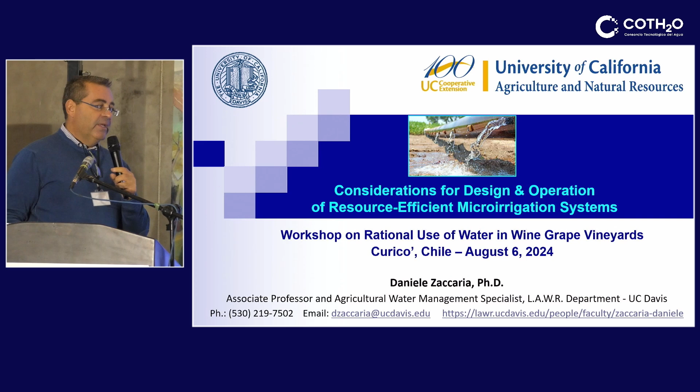In this presentation, I wanted to point attention on a few considerations that are often considered trivial, but I've seen in the last 15 to 20 years in California and many other places a lot of mistakes in design and operations of microirrigation systems. So today I want to point attention on a few things that are not trivial at all, especially when we are facing heat stress or drought and we don't have enough capacity on the microirrigation system.

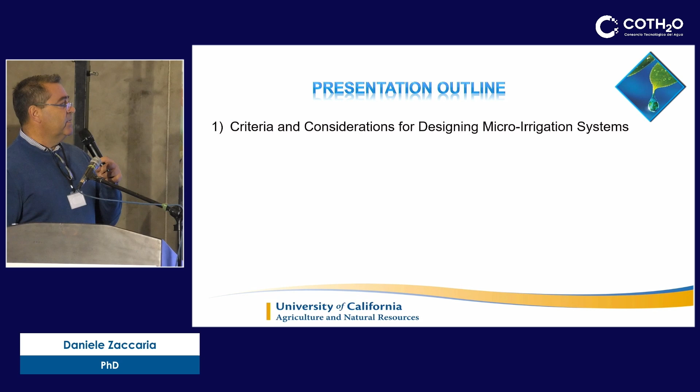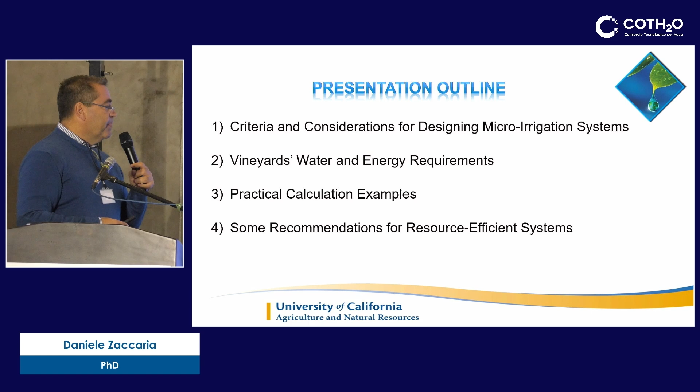So I want to go through a few criteria and considerations for design of microirrigation systems, and point on vineyard water management, vineyard water and energy requirements. Then I prepared a couple of calculation examples, but I'm not going to go through them for the sake of time, but those are useful for you later on for calculating the amount of water and energy needed for irrigating grapes. And I'll point out some recommendations for resource efficient irrigation systems.

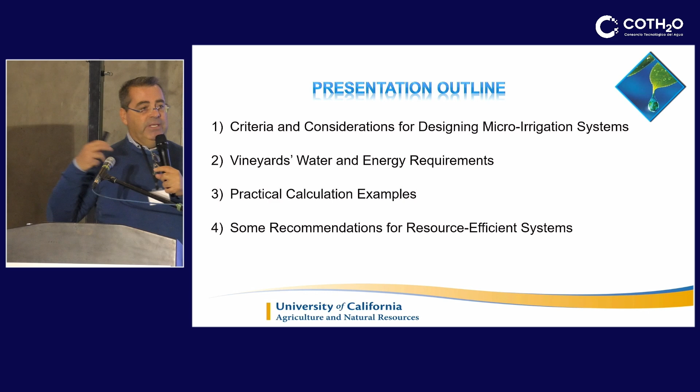I usually use the term resource efficient because it's not only a matter of water, but it's also a matter of energy. Energy is a big component in the budget now, especially after the energy crisis, the war between Russia and Ukraine. So we got a very high cost of energy, especially when we pump water from the aquifer. And the aquifer, in this climate of extreme variability of weather, is becoming some sort of insurance policy for growers. So being resource efficient means being efficient in terms of water and energy, all right?

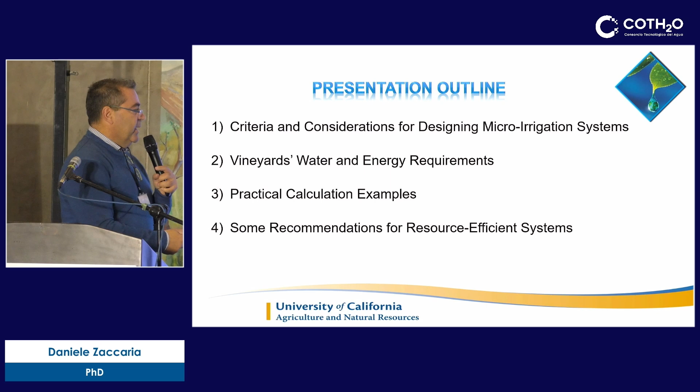So I wanted to give you some general understanding of what it takes to be resource efficient. First of all, everything starts with a good system design. It has to be somehow done by professionals that are skilled - we got one here - and it has to be accurate. It doesn't have to be cookie cutter, as we say, like the same concept applied regardless of the soil, regardless of the difference.

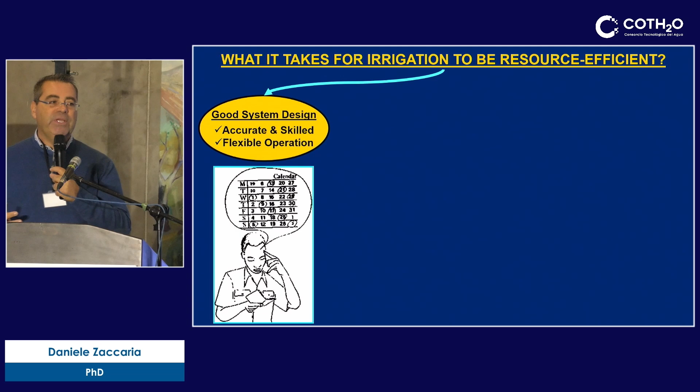But you also have to consider a flexible operation, because during the economic life cycle of the vineyard or orchard, we have to operate the system under different conditions. Then we have to have proper installation, so a good experienced installer, and after we install, there's regular maintenance and somehow periodic system evaluation.

All this stuff is always given for granted. Once you install a drip system, it's supposed to work at 95% distribution uniformity or efficiency for all its life. This is not the case. It depends on water quality, it depends on how the system is operated, it depends on the pumping system. So I've seen a lot of drip irrigation systems performing at 50% or 40% of application efficiency.

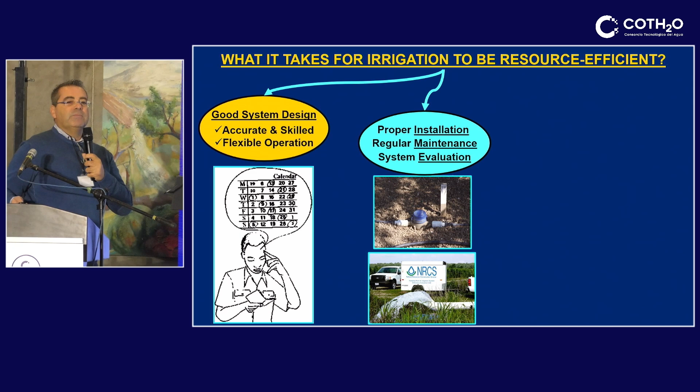It's very common in California that everything is given for granted, that the system performs well, and then we end up applying way less or way more of what we are thinking we are applying.

Then, after the two blocks are cleared out - so you have a good system in place, you have regular maintenance, and you have periodic system evaluation, you fix the problem - then you have to have somehow a defined irrigation strategy in mind, and this now has to be adaptive to the climate.

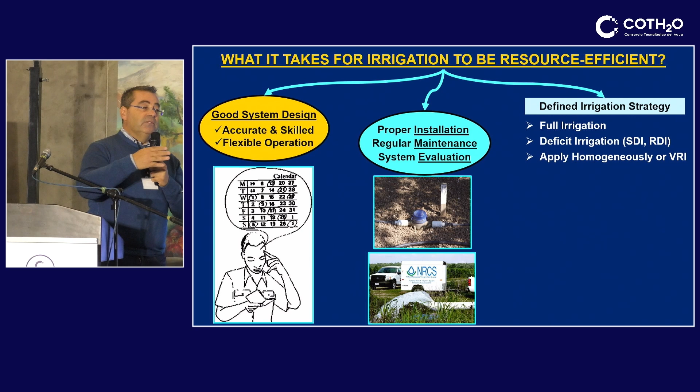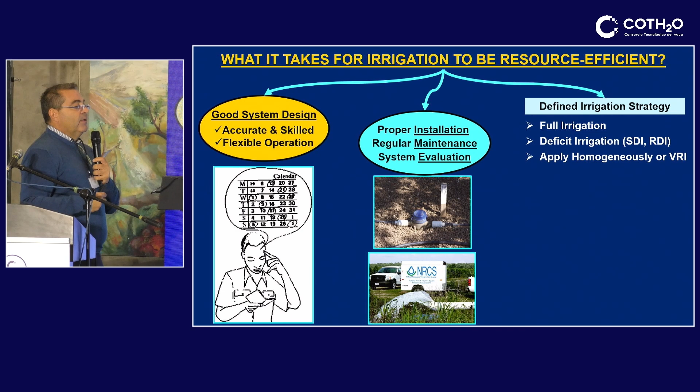So one year is drought, one year is wet, one year is average. So you have to have some sort of sense of how to apply water to your vineyards, and whether you're going to do full irrigation in a wet year or deficit irrigation. It could be sustained deficit irrigation, so below the potential, or regulated deficit irrigation, so apply less water during a specific stage, or you want to apply water homogeneously or site specifically.

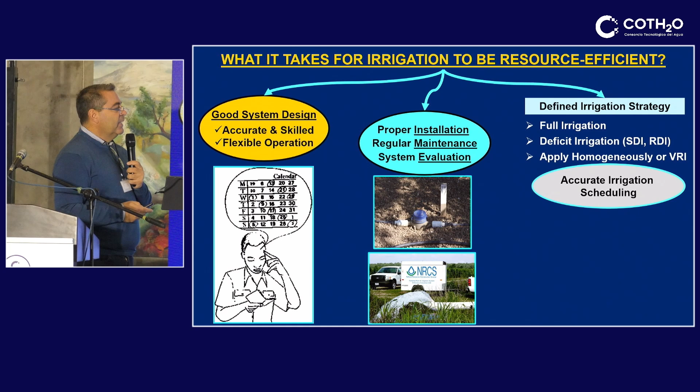So there are a lot of things that you have to consider in order to be efficient. Then you have to have good irrigation scheduling, accounting. We saw examples of satellite application. Mike gave a presentation on CropManage. So the scheduling is important, but then after the scheduling, you have to implement the schedule, all right?

And then once you implement the schedule, there needs to be feedback. So, have I implemented the schedule according to what I want to achieve with my grapes or not? So this looks like a very difficult pathway or route.

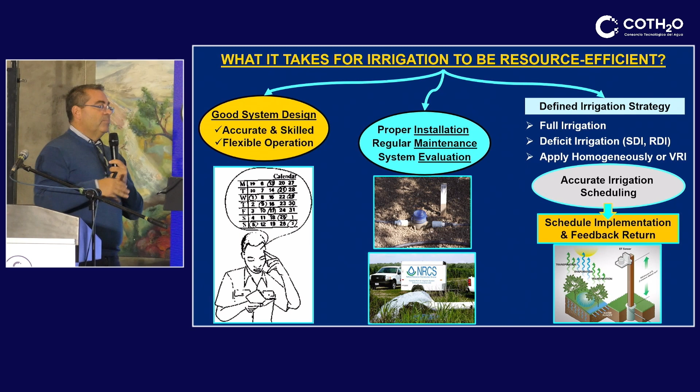But we always focus on - let me show you - the first block is related to good design, the second block is related to good maintenance, and the third block is good operation, right?

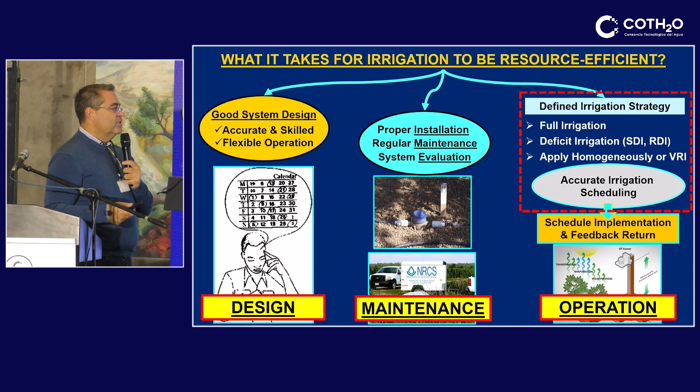We always focus our attention on scheduling, ET, and how much water the grapes have used. We always forget the first two, but if we don't know how much water our system applies, then the scheduling and the implementation is basically very much scrambled. We don't know.

It happens every time we do a system evaluation that we get inches per hour, or millimeters per hour, applied by the system that are either way more or way less than the design. And it happens every time. So when we show the data, most of the time the farm managers say, no, this is not possible. We'll say, okay, let's repeat the measurement. And then that is the case.

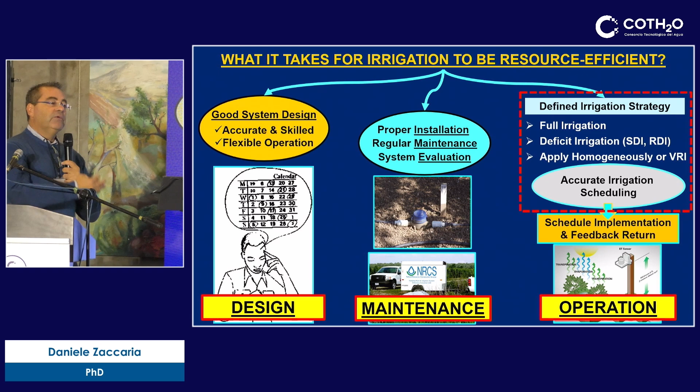So what I wanted to say is if you don't take care of these two parts in a good way, all the rest is kind of scrambled. All the rest becomes problematic.

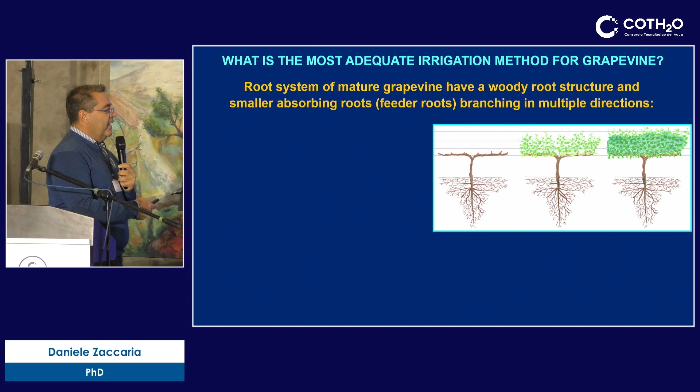So the research over the last 20 years has shown that grapevine in different growing conditions has a woody structure, kind of an anchorage of the plant, of the vines, and then it has feeder roots that mine the soil in different directions. So basically we got feeder roots that go horizontally and deeply, and those roots don't stand water ponding. They don't like asphyxia or hypoxia, and so they thrive in unsaturated soil.

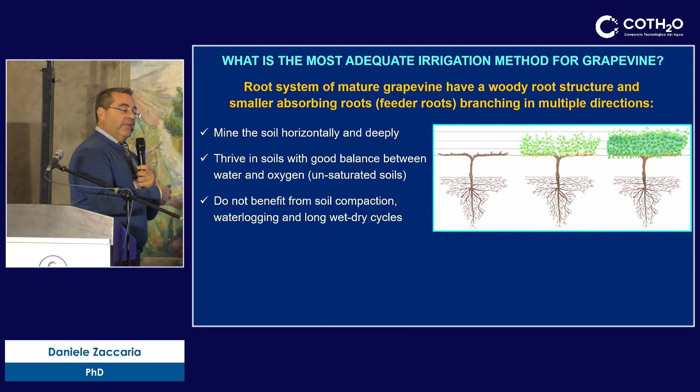So this is one of the reasons why somehow surface irrigation and sprinkler irrigation were abandoned in vineyard management, and now more and more grapevine production is becoming precision irrigation with micro irrigation systems. So most of the time in most of the growing areas, low volume micro irrigation, so drip and micro sprinkler, are mostly used for grapevine.

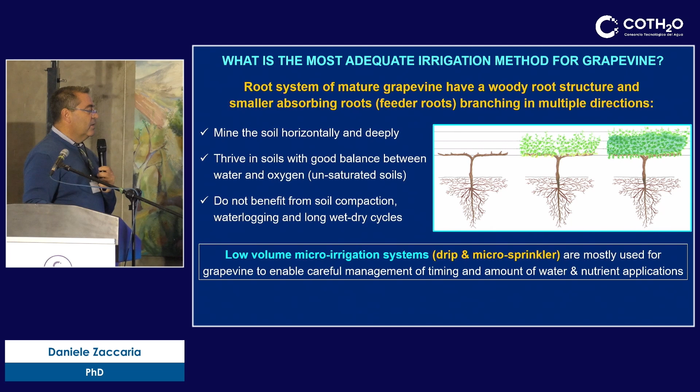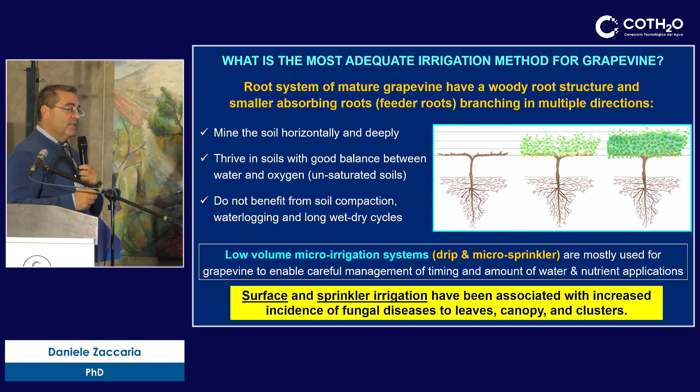Surface and sprinkler have resulted in somehow increased incidence of pest disease. So they are now being considered for other purposes, like during winter for groundwater recharge, or for leaching. When you have salty water, you have to leach, then drip is not so effective. But for irrigation purposes, probably drip irrigation and micro sprinkler fan jets are among the best systems.

So what are the aspects where to focus the attention? At the design stage, first of all, we have to somehow get a sense of what is the available water supply, type of soils, and how it varies across the vineyards, what's the slope, and what's the aspect. So it's north-facing, south-facing, if we have hillside terrain.

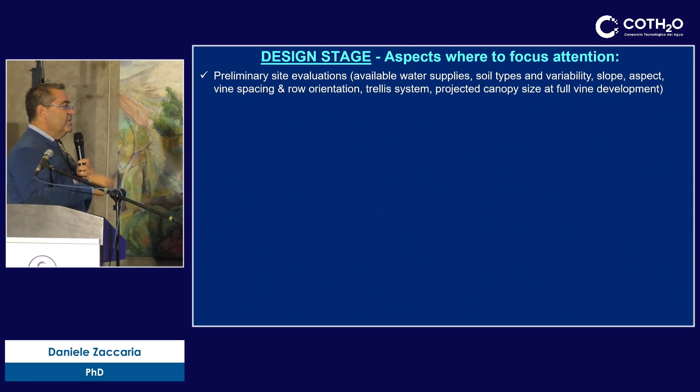What is the projected vine spacing? So the planting density and also the row orientation make somehow a difference, because as I showed in the other session, it all depends on the amount of energy that the vine intercepts. So the amount of ET is depending on the interception. Also the trellis system that you project, over the future, what kind of trellis system you're going to grow, and the canopy size at full development. So those are aspects to be accounted for.

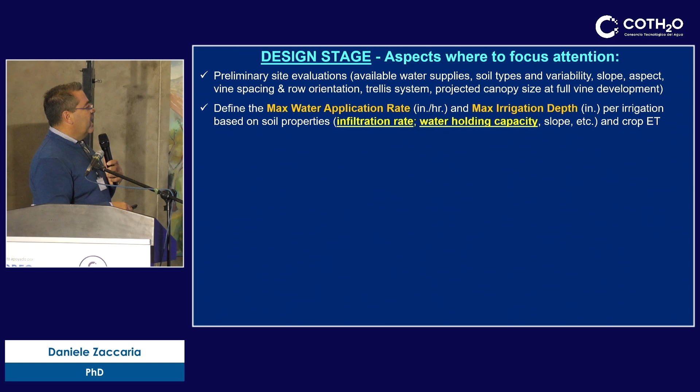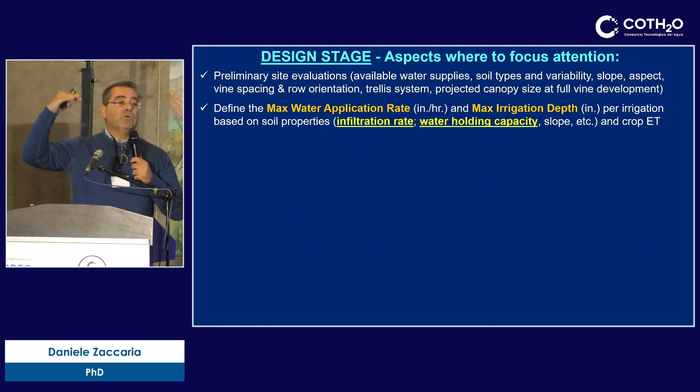So then we normally design a maximum water application rate. This is millimeters per hour or inches per hour, and a maximum irrigation depth that your soil can stand, because you don't want to have deep percolation. You want all the water that you apply to be retained by your soil, right? And these are based on soil properties normally. So the water application rate doesn't have to exceed the infiltration rate, and the maximum irrigation depth doesn't have to exceed the water holding capacity of your soil. Otherwise, the design is basically useless. Because I've seen a lot of drip systems that after half an hour, they get ponding after the dripper, and that's basically a bad design, all right?

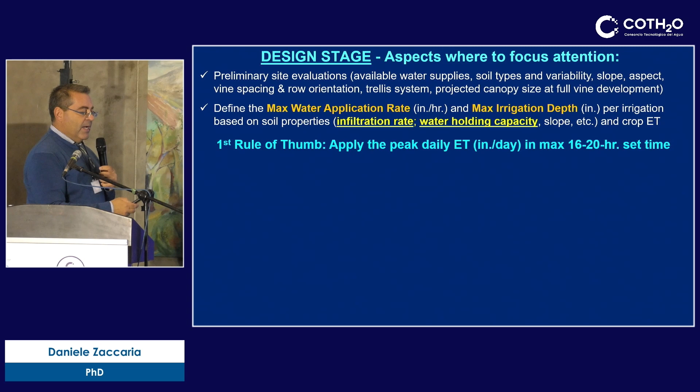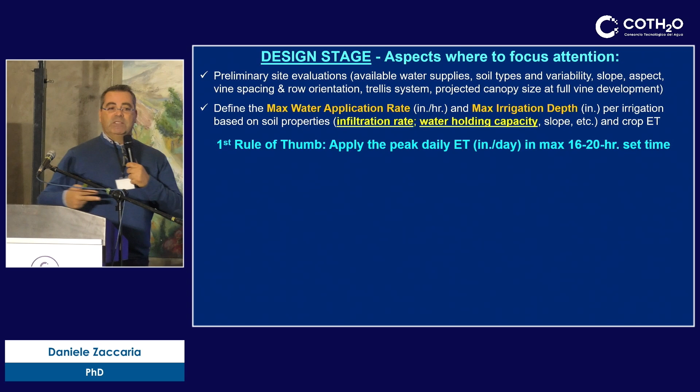So the first rule of thumb in design: apply the peak daily ET, or match the water to the peak daily ET, in less than 24 hours. Most of the systems that I've been dealing with in the past 20 years were designed for the lowest investment cost, the lower installation cost. So the maximum daily ET was designed for 24 hours. So if the system gets broken or the pump gets broken, there's no time off to recover, to catch up. So a clear recommendation is shorten the operation of the system to 16 hours, so every day you've got some time to catch up if something goes wrong.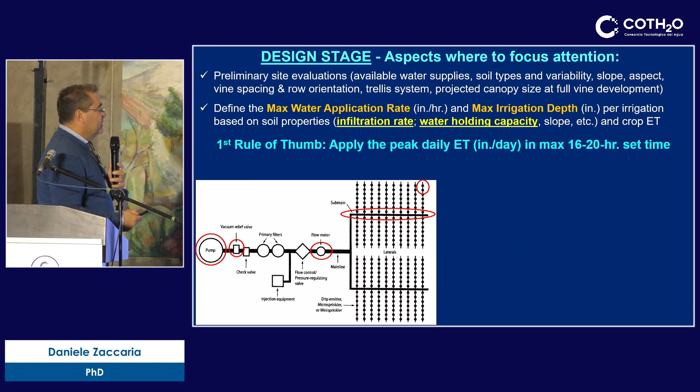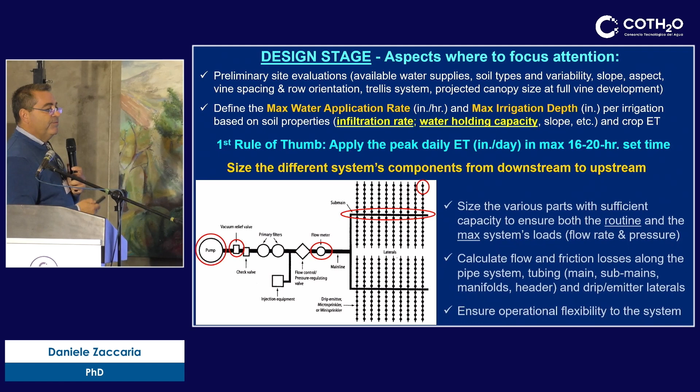Then normally we size the different parts of the system from downstream to upstream in order to somehow account for the flow rate, which is the maximum application rate and maximum irrigation depth. And we calculate the flow and friction losses along the pipe system, but we wanted to ensure the operation flexibility. Operation flexibility is something that I'm going to show here. So it means that the system must perform at a high level for different ranges of operating conditions, so different levels of pressure and different levels of flow rate, right?

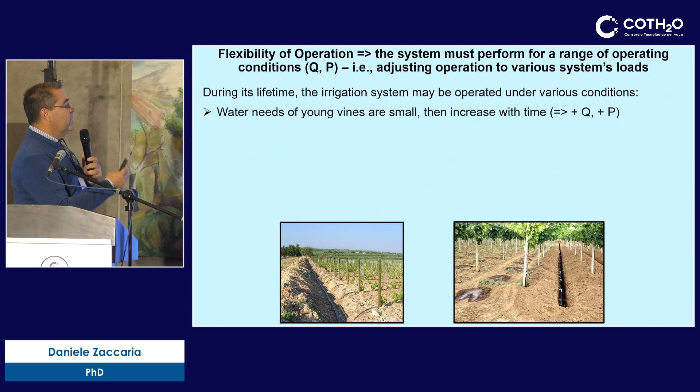So we want to be able to adjust the operation according to what we call the various system loads. During the lifetime of the system, water needs of the small vines are small, and then they grow over time. So over time, we have higher flow rate, higher pressure that we need.

Each block may have a different elevation with respect to the pump, or different distance with respect to the water supply, so it must be sized for a different level of pressure. Everything has to be accounted for, including blocks with different emitters, because we might have different soils in different parts of the farm.

So we need to account for different flow and pressure for the different blocks. Sometimes we have a composite system where, in areas sensitive to frost, we might have micro sprinklers for frost protection and drip for irrigation. We need to balance that too, making sure the system can operate for different flow, pressure, and frequency.

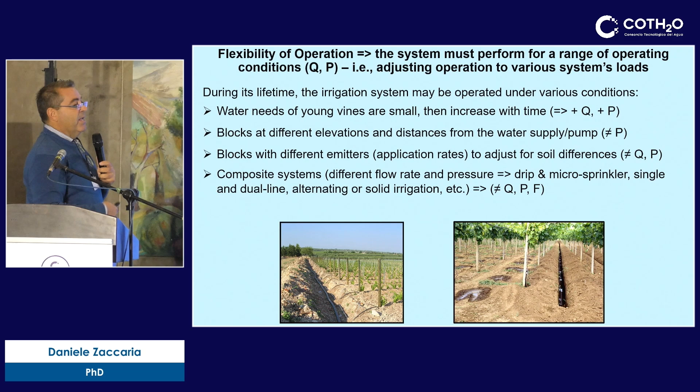The aquifer level over time might fluctuate, so your system needs to adjust for this change in total head. What we're experiencing in California is a sharp decline in the aquifer, so sometimes growers have to pull out the pump, increase pump capacity, or get a new pump or engine to accommodate something the system wasn't designed for.

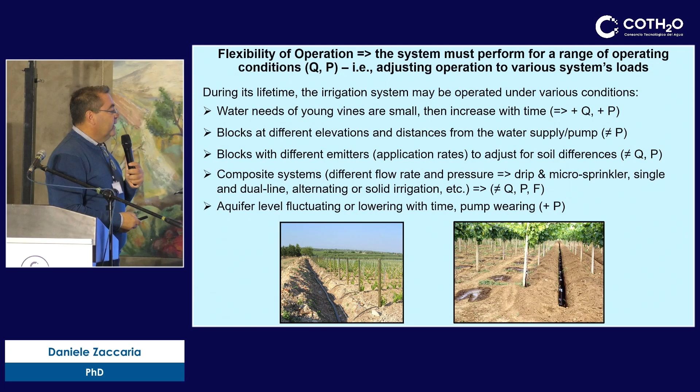Because of a progressive decline in the level of the aquifer. The second rule of thumb is the application rate. This is completely ignored by some designers most of the time. The application rate, in millimeters per hour or inches per hour, must be way less than the basic infiltration rate.

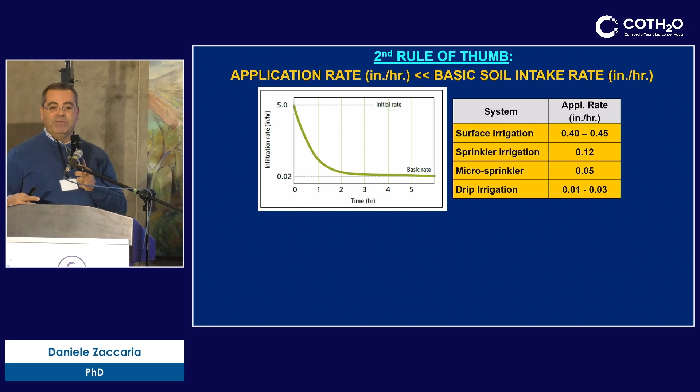The basic infiltration rate is not what you get at the beginning when the soil is dry. You have to wait a few hours until the infiltration rate becomes constant. That constant value is your reference value.

So you want to apply water at a rate lower than the infiltration rate. This is normally the application rate for different types of systems. These are general guidelines, but I also wanted to show you something else.

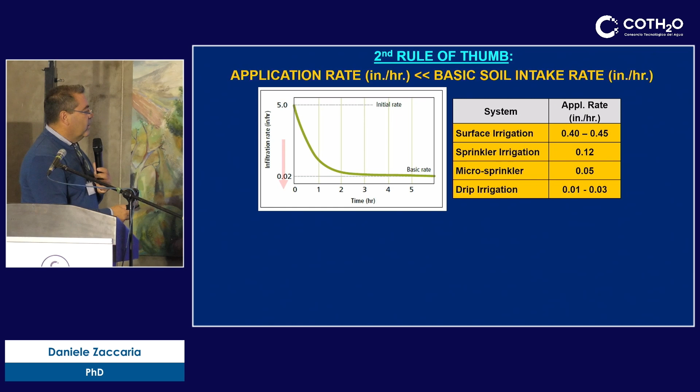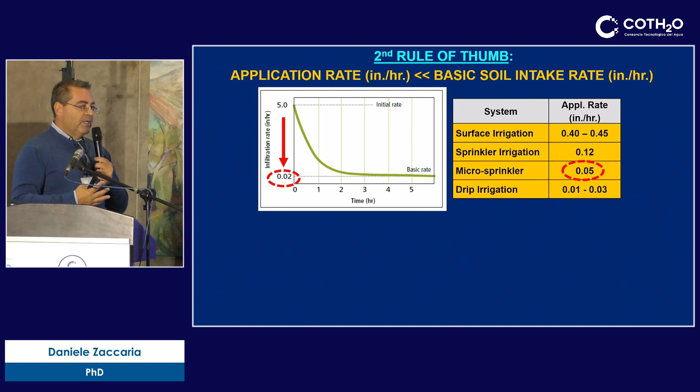If we apply a micro sprinkler system where our basic infiltration rate is 0.02, we're going to have water ponding, so we need to pulse irrigation on and off. Otherwise you don't get water to penetrate, and you create conditions for asphyxia, lack of oxygen, water ponding—a lot of problems.

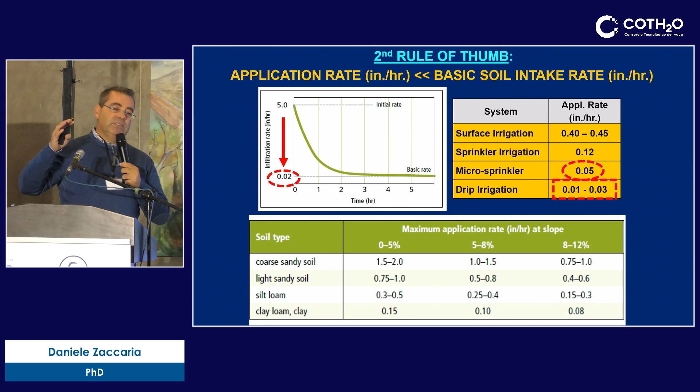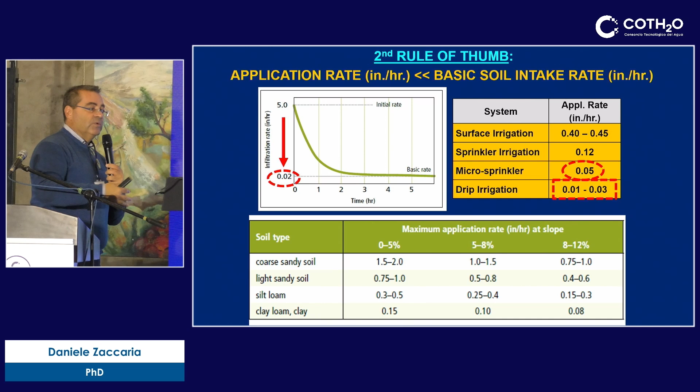These are another table with general guidelines for different types of soil and different slopes—the recommended maximum application rate to keep in mind when designing a system. The steeper the soil, the faster water runs, so there's less opportunity for the water to penetrate, meaning you have to apply less and less water, with lower application rates, as the slope increases.

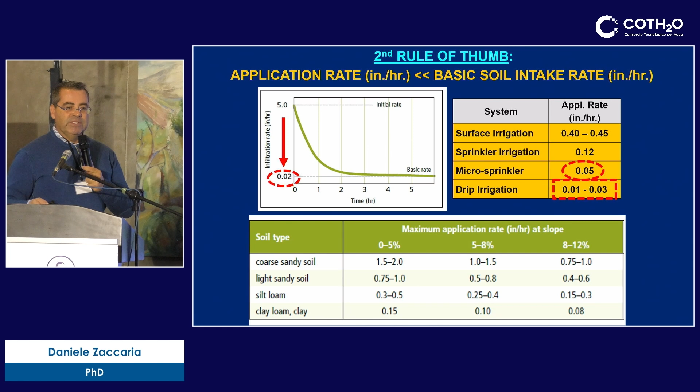Again, these are general guidelines, but it's better to get a good sense of your soil when designing a system. This is always overlooked because basically nobody does a soil survey before designing. Most of the time the soil survey is done after designing, when problems already exist, and then you have to find a way to retrofit the system.

The third rule of thumb is that the maximum applied water, in inches, should be way lower than the water holding capacity. This is another table I give you—in inches per feet, though conversion is easy—for the different

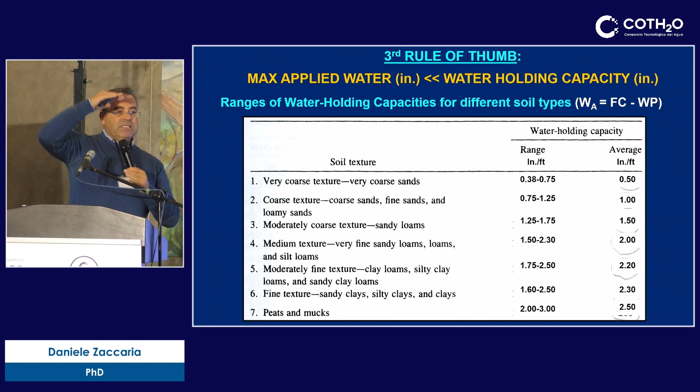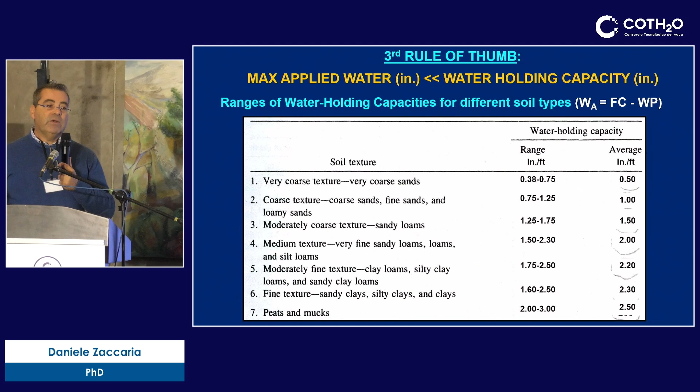types of soil, showing what water holding capacity range you have, with an average value for each soil type. Your maximum amount of water—application rate multiplied by the number of hours of application—should not exceed this, otherwise you waste water, energy, and nutrients. This is also important for operation.

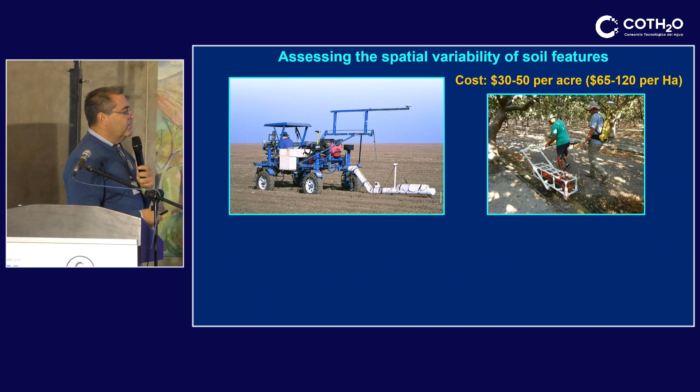There are also ways now to assess the spatial variability of soil. With electromagnetic induction, you scan the soil and get a sense of the differences in texture. You have to do this survey under field capacity conditions, after an abundant rain, to get a sense of the differences in texture.

There are also methods to understand the properties of the soil before the mistake is made, and this is something nobody actually does. There's a disc infiltrometer to understand how much water penetration you get over time—after 2 hours, 4 hours, 6 hours of irrigation—and also the water moving laterally, which is also important for design and operation.

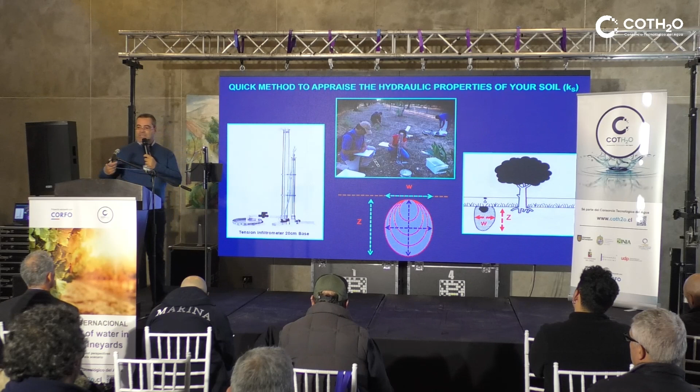So there's an easy measurement before the mistake is done. Again, this is a disc infiltrometer. You measure the saturated hydraulic conductivity, do a few samples, and get a sense. The alternative is to lay down a dripper, operate for 2 hours, operate for 4 hours, and get a sense of how the wet area changes. But it actually takes more time to do the field test.

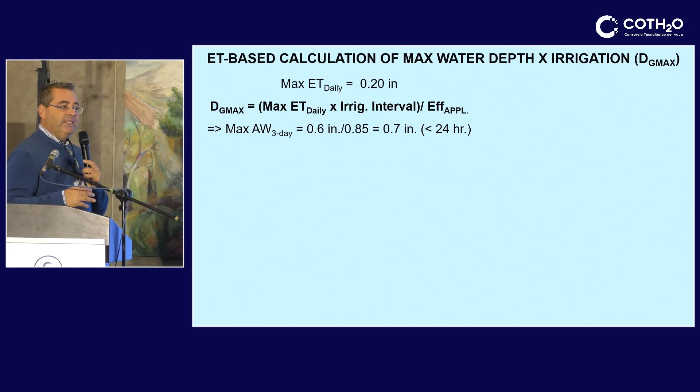So this is the criteria for calculating the maximum amount of water to apply to match ET. Here we're not looking at the soil, we're looking at maximum peak daily ET that we get from the crop. Here's an example: let's imagine that for some crop in California, the maximum daily ET is 0.20 inches. That means 5 millimeters per day.

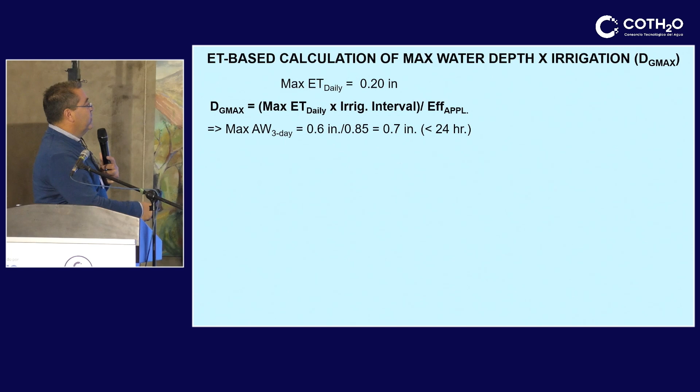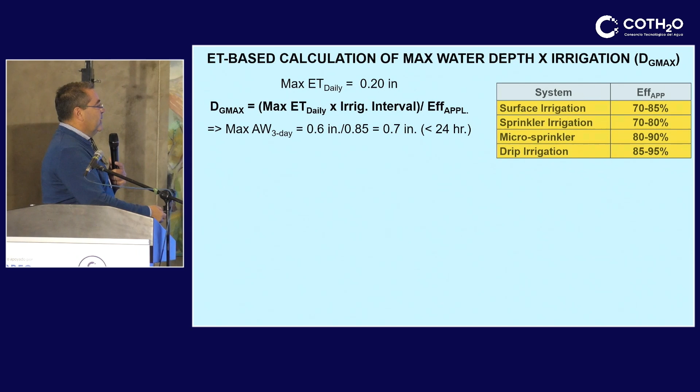Normally we calculate the maximum amount of water to match that ET by using the maximum daily ET multiplied by the irrigation interval, then divided by the efficiency of application. So that's an example that I ran for you. That amount of water we have to apply, the maximum amount to match that peak daily ET, should be applied in less than 24 hours. Otherwise, you don't have time to recover from misworking or misoperation of the system.

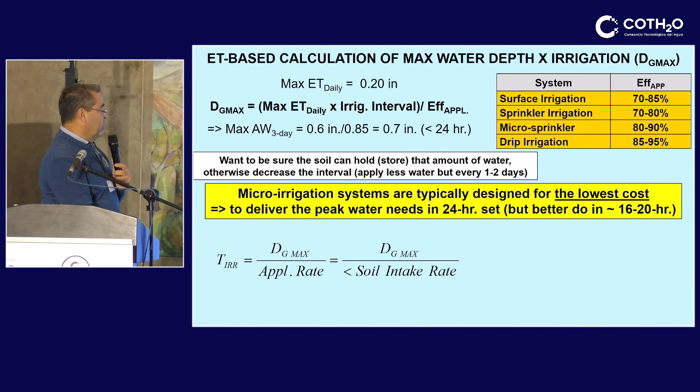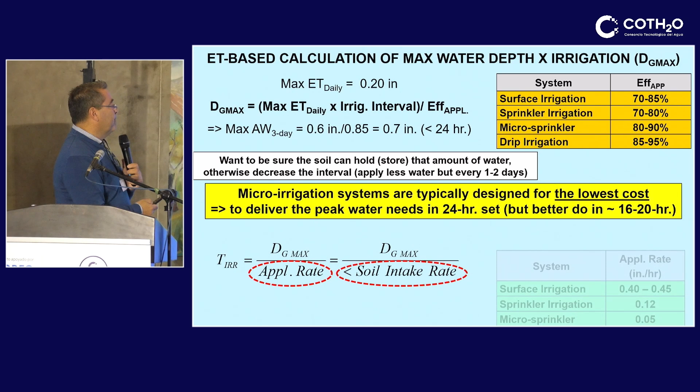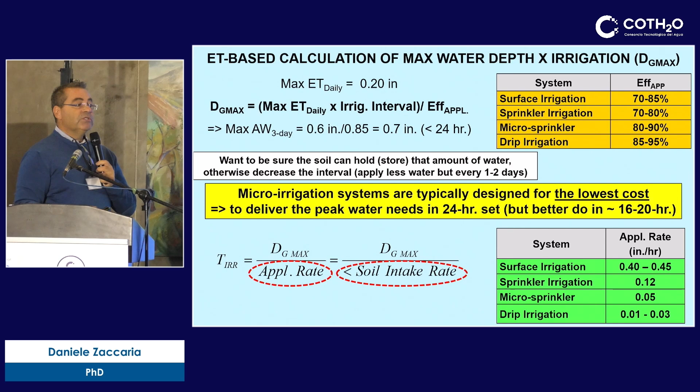Now, we did this regardless of knowing the soil, but then we have to check whether this amount of water, 0.7 inch, is compatible with the soil. This is what we normally do to make sure that the amount of water to match ET is compatible with the soil water holding capacity. There's a few steps of calculation. If that amount of water exceeds the water holding capacity, then you shorten the interval. So instead of applying water every 3 days, you shorten the interval, applying less water but every 2 days or every day. That's how you solve the design problem.

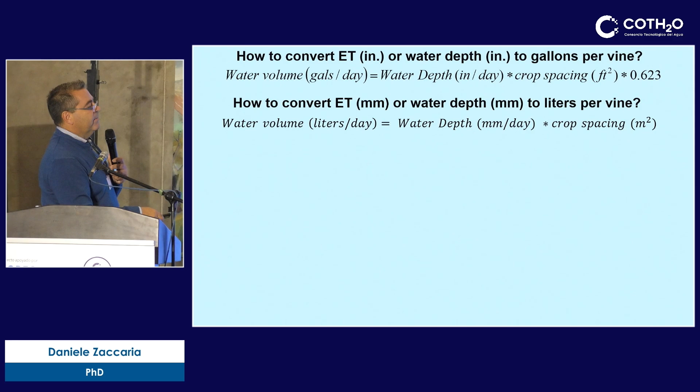This is another calculation example, and at the end there's another example I prepared. Now the question is how to convert ET into an amount of water in liters per vine or gallons per vine. If you use English units, you multiply that ET in inches per day by the crop spacing, the plant spacing between the vines, multiplied by a 0.6 coefficient. If you use metric units, you just apply the multiplication between the amount of ET you have to satisfy and the crop spacing. That converts the ET into gallons per vine or liters per vine.

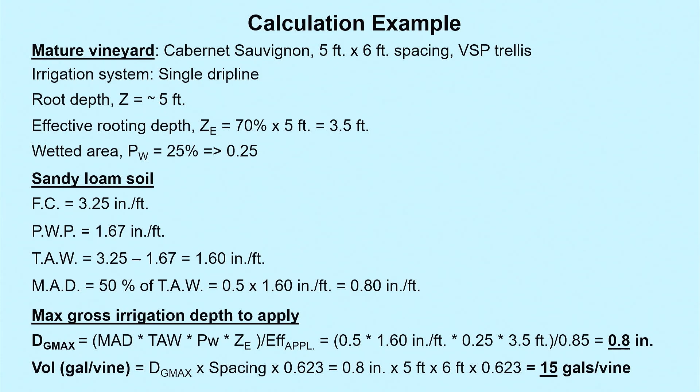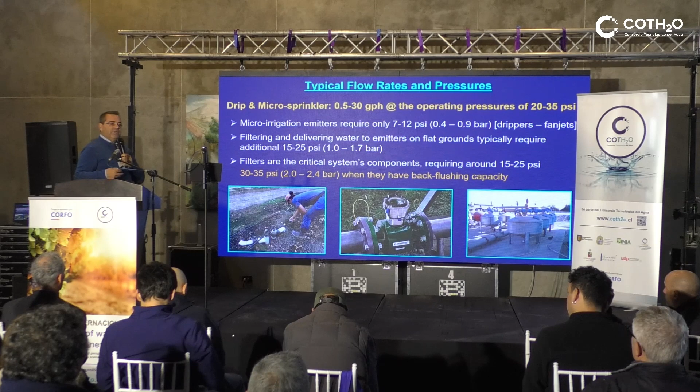Typical flow rates and pressures of drip and micro sprinkler vary between 0.5 and 30 gallons per hour at an operating pressure of 20 to 35 psi. The emitters don't require all this pressure, but most of the time we have a filter, which is a basic component requiring additional pressure with respect to the emitters, especially when they have back-flushing capacity. So you have to consider all this pressure in order to size your pump.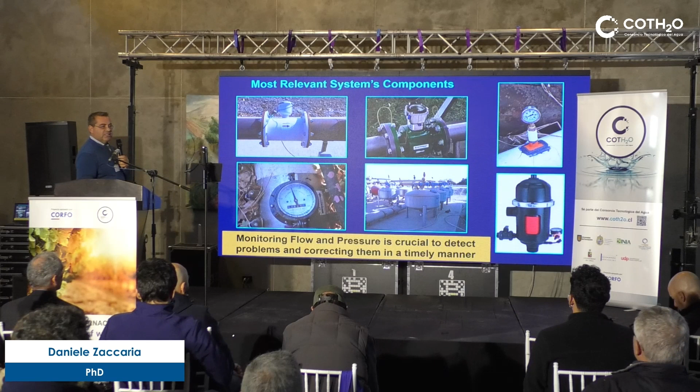The most relevant system components are normally the flow meter, because you can easily spot a leak or a clogging with respect to the flow the system should allow under normal operating conditions, and also the pressure meter or pressure gauge at different critical points. Those are the most relevant system components to troubleshoot. So never forget the flow meter—it's probably the most important part of an irrigation system.

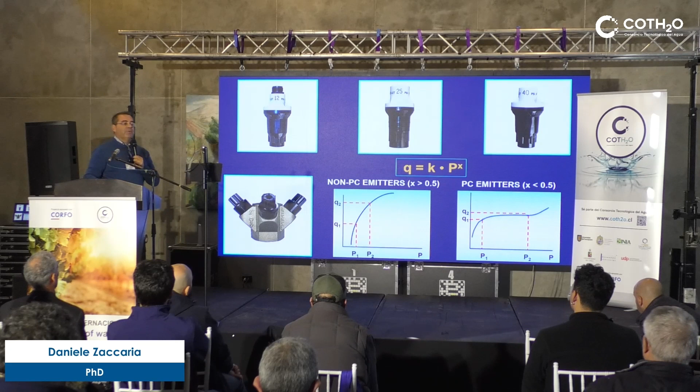In some cases, we need to put pressure regulators at the beginning of each line, especially with undulating terrain, because you might want to normalize the inlet pressure into the drip line. You want to make sure the flow doesn't change so much with respect to the inlet pressure. Those pressure regulators stabilize the pressure in order to normalize the flow along the line. Water requirements of grapevine.

Normally in California, it varies depending on the area and weather conditions, whether coastal or inland, between 400 and 700 millimeters per season.

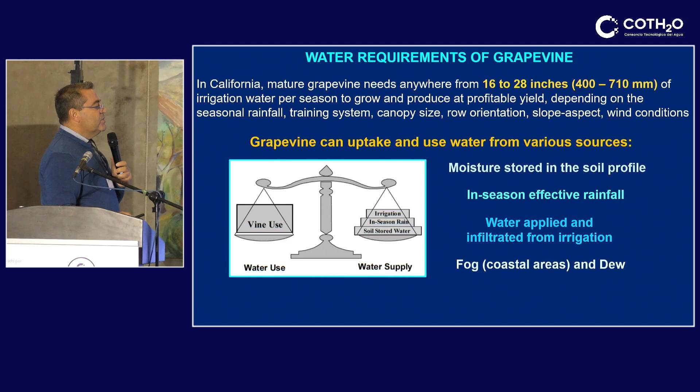This water can come from different sources: soil moisture residual from the winter, and irrigation. Sometimes in coastal areas you get fog and dew, an additional source of water contained in the air. It doesn't evapotranspire from the soil, but somehow there's a dew fall on the vegetation and on the ground, and that water contributes to evapotranspiration.

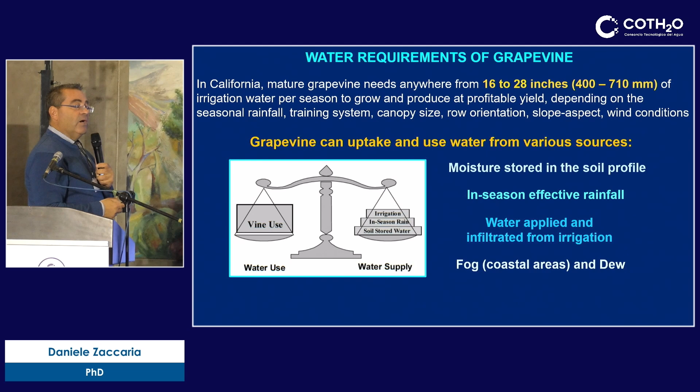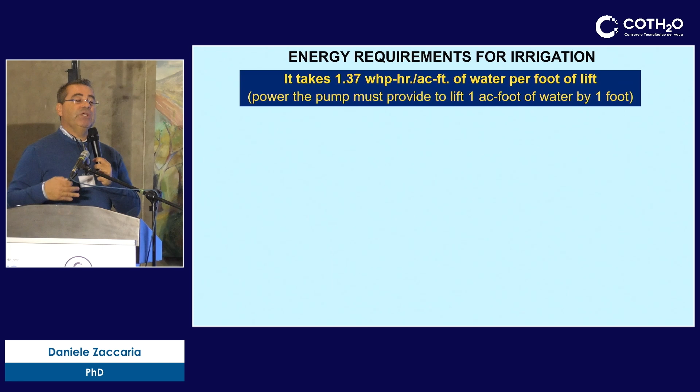Energy requirement, probably my last slide. You can calculate how much energy you need per your vineyard. This is in English units, but the conversion is easy. It takes normally 1.37 water horsepower hour per acre foot of water per foot of lift. That's pretty standard.

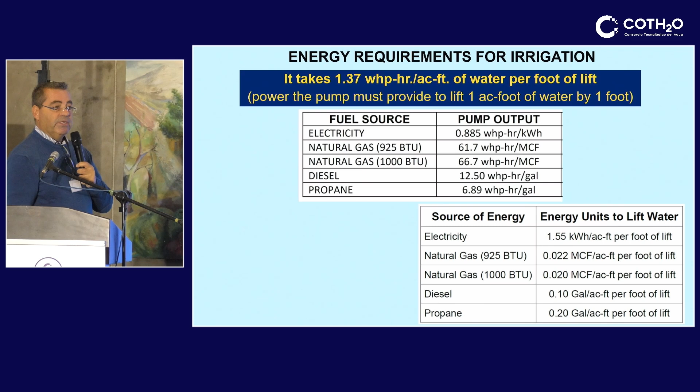Different sources of power - electricity, gas, diesel, propane - have characteristic outputs. For instance, 1 kilowatt hour of electricity provides 0.885 water horsepower hour. From this you can calculate the amount of energy required to lift the water. By doing your hydraulic calculation, you get a sense of how much energy you're going to use and how much money you're going to spend per energy.

I think this is taken from the Nebraska pumping plant performance criteria. It's considered somehow a standard reference for the United States.

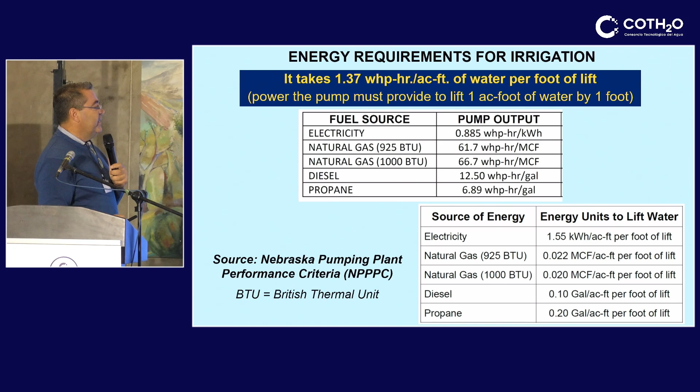I want to show you one more thing - I developed an additional example in this presentation to calculate the energy needs for micro sprinkler and drip irrigated vineyards. I calculated total dynamic head of micro sprinkler at 180 feet, and total dynamic head of drip irrigation at 158 feet, because there's less pressure needed by drip. And the total acre foot of water to irrigate and match ET - I think ET seasonal is 18 inches here.

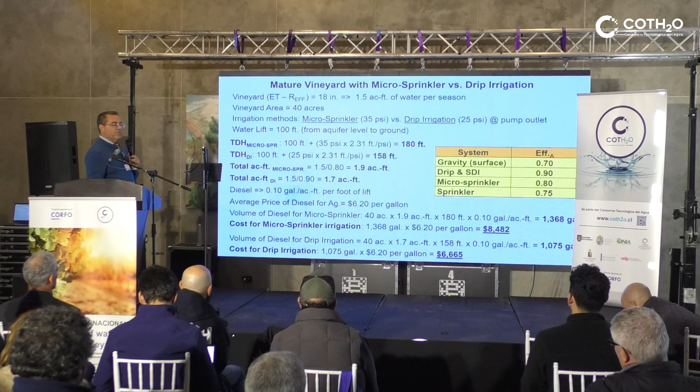I did this calculation for a diesel power pump, and it comes out that the micro sprinkler will need 1,368 gallons for the 40 acres, at an amount of money that is $8,000. In drip it's way less, because you're pushing and pressurizing water less.

The last thing I want to mention is that a lot of systems and energy providers are now moving to time of use pricing. It's like imagine you have a Tesla or hybrid car - depending on when you plug it in, the energy rate, the price of energy will change. So the criteria now in California for designing irrigation systems, because energy is the highest cost for growers, is to go around the high peak rates.

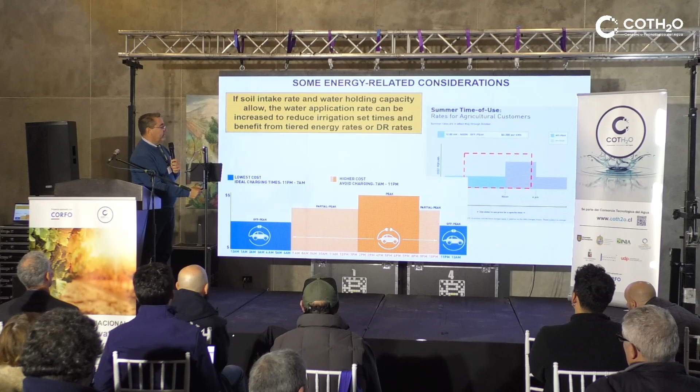Let's look at this quickly - you have a very low rate until noon, and then from noon to 6 p.m. is the highest rate. So if you need to irrigate for 24 hours because your system was designed for the lowest investment cost, you're going to spend a lot of energy because you have to run it for 24 hours to match ET.

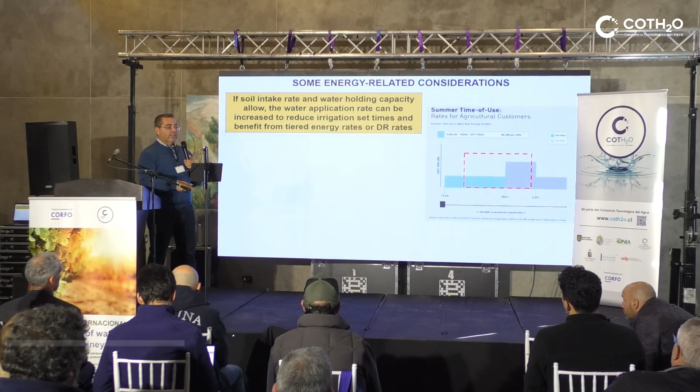If the soil allows, you can increase the capacity and apply that amount of water in a shorter time, and that will lower your energy bill quite a bit. A lot of growers now are designing the system to increase capacity by 20, 25, 30% and lower the cost of energy. So the real cost for a 20 or 25-year vineyard is not the investment cost of today, it's what you're going to pay over 25 years to operate the system. If you're smart, you might want to increase the capacity if the soil allows, for having an energy efficient system.

When you automate the system, you can start and stop depending on the time of use. In California it's going to be like this: you have off-peak from 11 p.m. to 7 a.m., partial peak, and peak during the day, with energy rates increasing. Your system should be irrigating during off-peak to reduce energy cost, and if you have automation you can do that. If you have manual operation, nobody goes there at midnight to open and close, so consider automation.